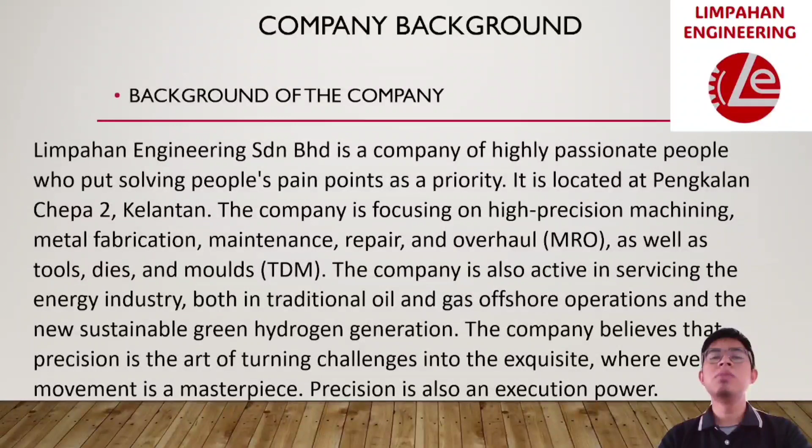The company believes that precision is the art of turning challenge into the exquisite, where every movement is a masterpiece. Precision is also an execution power.

Next is my roles and responsibilities during my internship at the company. My role at the company is as a designer in the operation department. My responsibility first is to design the product needed by engineers. Second, to prepare the design drawing.

Third, to prepare the detailed drawing and make an isometric drawing. Fourth, to sketch the product that has been fabricated using SolidWorks. And fifth, to measure the product that has been fabricated.

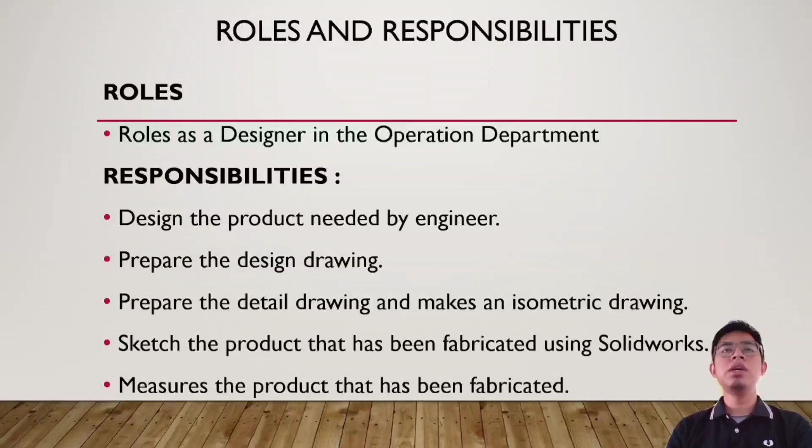Next, the project that I handled during my internship is first to do the design drawing of the chemical storage rack. This is a chemical storage rack that has been fabricated. First, I make a rough sketch for the project, called chemical storage rack, that has been fabricated. This is a rough sketch.

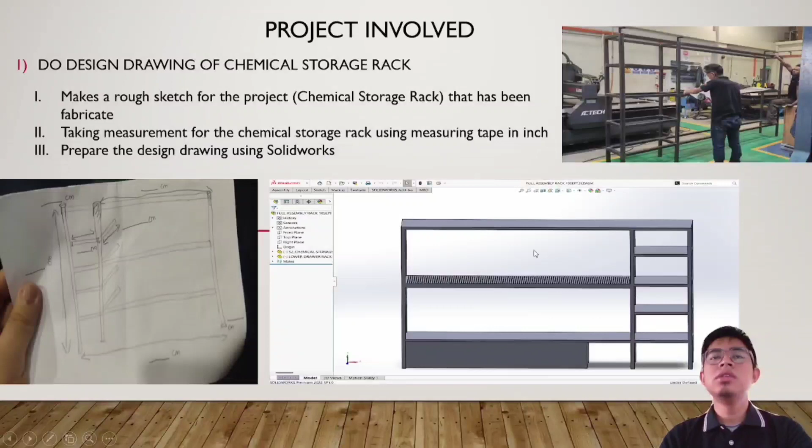Next, I take the measurement for the chemical storage rack using measuring tape in inch or cm. And then I prepare the design drawing using SolidWorks. This is the design drawing that I have made using SolidWorks.

Fourth, I prepare the part drawing detail for the chemical storage rack needed by the engineer. This is a part drawing, also called detail drawing. And fifth, I was involved in helping paint the product for a better finishing process. This is the red color of the chemical storage rack.

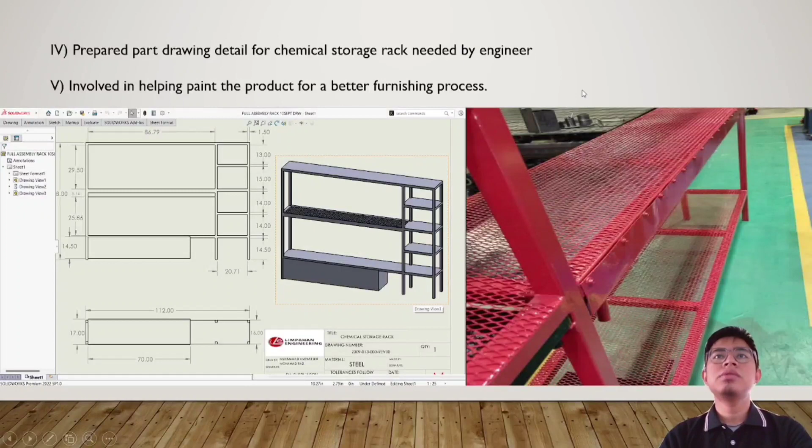And then I help with placing the chemicals and other waste on the rack according to the type, such as coolant oil, paint, and other material that is easy to burn.

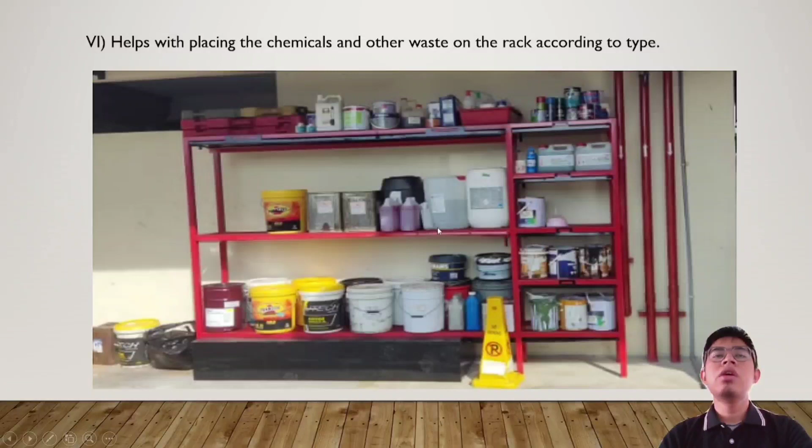Next, I do the design drawing of the IBC tank. As we can see from the slide, this is the image of the rough sketch that I sketched as I measured the component. Next, I take the measurement of the IBC tank using the measuring tape in inch or cm. Then I prepare the design drawing using SolidWorks.

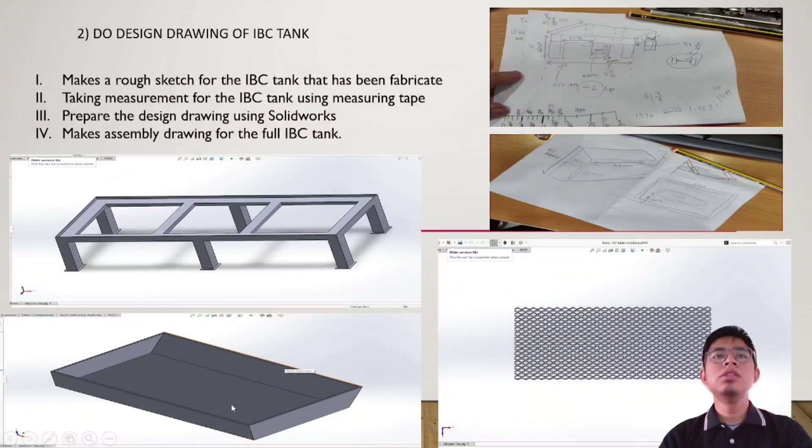These are the three design drawings that I prepared, starting from the body of the IBC tank, bottom surface of the IBC tank, and mesh pattern of the IBC tank. And then I make an assembly drawing for the full IBC tank. This is an example of the assembly drawing.

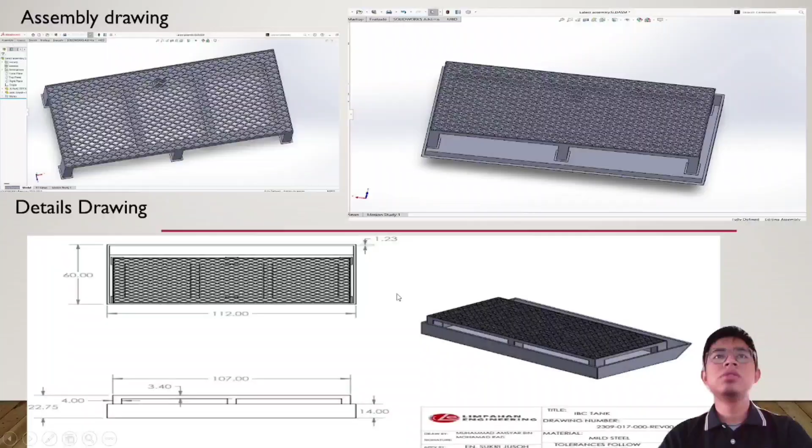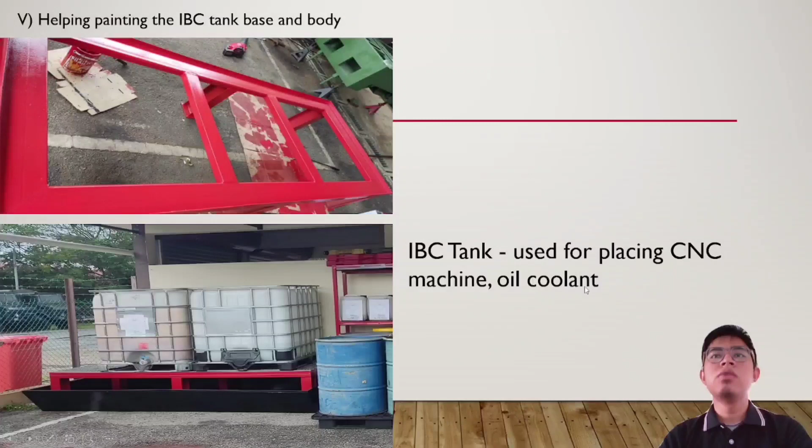And this is an example of the detailed drawing that I have made by taking out the dimensions and sending it to the production engineer. I also help in painting the IBC tank base and body, which are red color, and help place the IBC tank at the specific location. The IBC tank is used for placing CNC machine oil coolant.

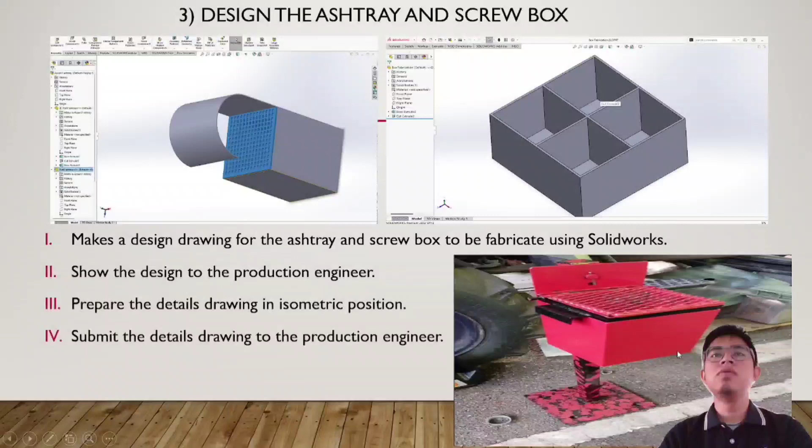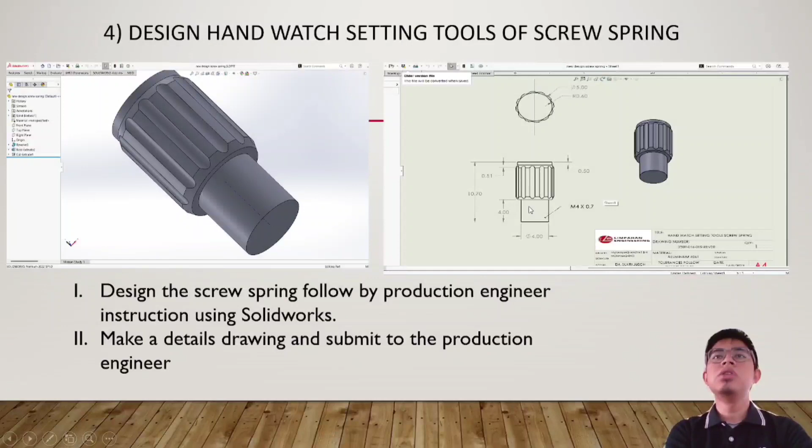Fifth, I make a detailed drawing for the burgeon, also called hand watch setting tools. First, I check and make a detailed drawing. Then I edit the sheet format of the detail drawing and rename it according to the drawing number list. This is an example of the detail drawing that I have checked and made.

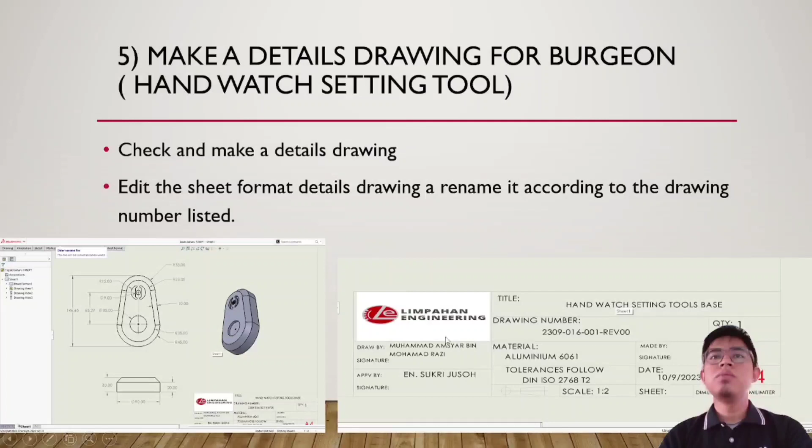And this is the format detail that I have given the number and the name. This is a full example of the burgeon, or hand watch setting tools, that I have made part drawings for.

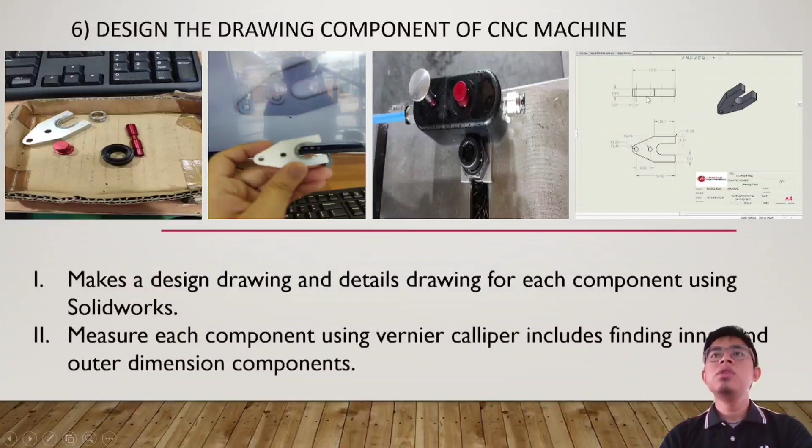And the sixth project, I designed the drawing of the components of a CNC machine. It has five designs for the CNC machine, and I managed to do all five designs of the CNC machine components. I made a design drawing and detail drawing for each component using SolidWorks and measured each component using a vernier caliper, including finding the inner and outer dimensions of each component. I also made a part drawing or detail drawing for each component.

Next, I also helped in 3D printing of the drill holder. I printed the drill holder for the CNC apparatus using Ultimaker and IdeaMaker 3D printing machines. This is an example of the IdeaMaker, and this is a drill holder for the placement of the CNC machine tools such as end mills and other components.

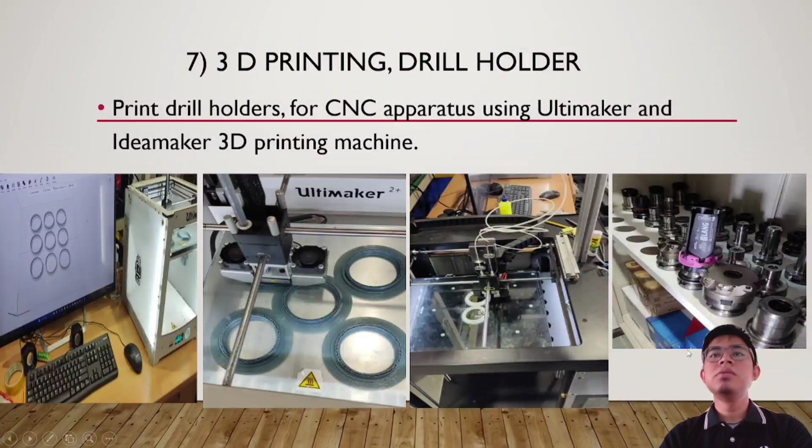Next, the subject that I have learned and applied during my internship is SolidWorks skill. For the summary, similar to the CATIA V5 software used in UiTM, both are the same in defining parameters and constraints. The assembly design, which is able to create complex assemblies consisting of multiple parts and components, is also the same. Next, the subject I have learned is detail drawing or part drawing. Creating a detailed drawing before starting a fabrication project is crucial for quality control and precision in manufacturing.

Next, the subject I have learned is 3D printing machine skill, which is similar to the subject that I learned during lab manufacturing at UiTM. We were able to understand the basic skill of using the machine by setting it up. The next subject that I have learned is gaining working experience, because it helps to build a confidence level and prepare for the real working field.

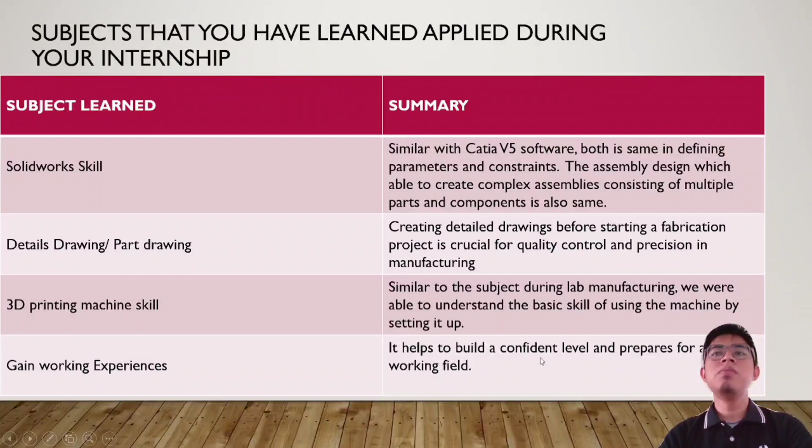Then the next subject that I have learned is types of material. This is an example of the types of steel. I understand the different steels such as aluminium 6061, stainless steel, mild steel, carbon steel, and aluminum steel. I also understand the different types of screws such as bolts and nuts, socket or cap screws, button screws, and countersunk screws. And lastly, I was able to learn basic CNC machine knowledge.

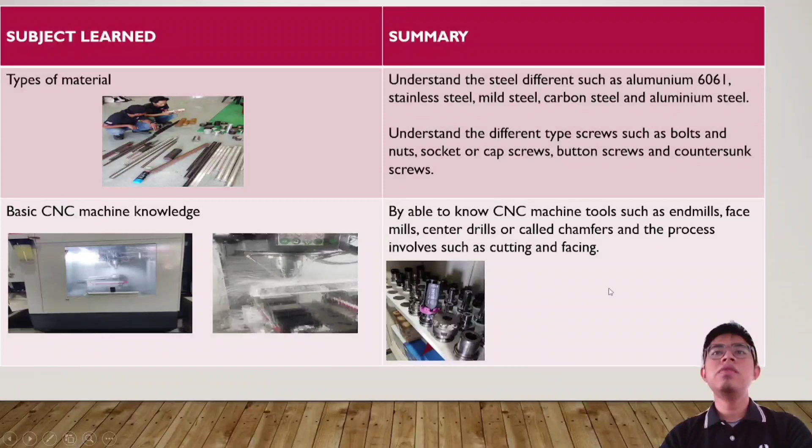I was able to know CNC machine tools such as end mills, face mills, center drills or chamfers, and the processes involved such as cutting and facing. This is an example of the CNC machine tools.

And next, the challenges that I faced during my internship. One is the challenge of using new software, from CATIA V5 to SolidWorks. Next, the challenge of using different 3D printing machines. There are three machines that are different to set up, such as Prusa, Raise3D, and Ultimaker. Each of the machines has its own setup. The next challenge is the deadline of the tasks given. For example, the detailed drawings and design drawings that I made had a deadline to be submitted to the production engineer.

The next challenge I faced is the learning curve. Adapting to a new work environment, company culture, and industry-specific practices can be overwhelming initially to me. Lastly, precision and accuracy. For example, achieving the required level of precision in measurement, drawing, and the manufacturing process can be a significant challenge because it follows the precision needed by the detailed drawing.

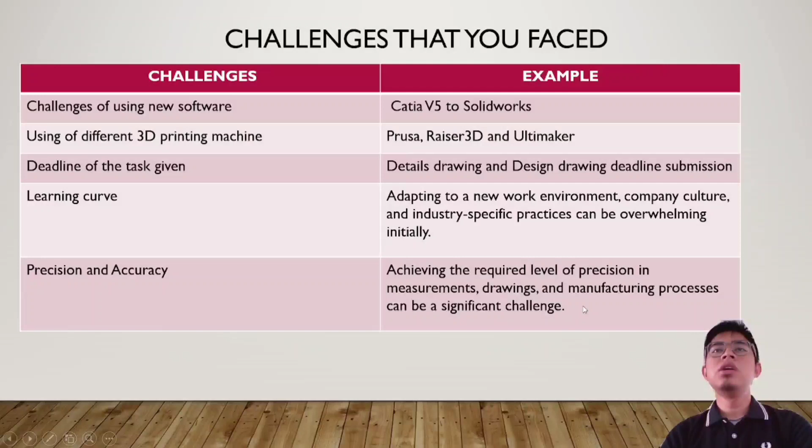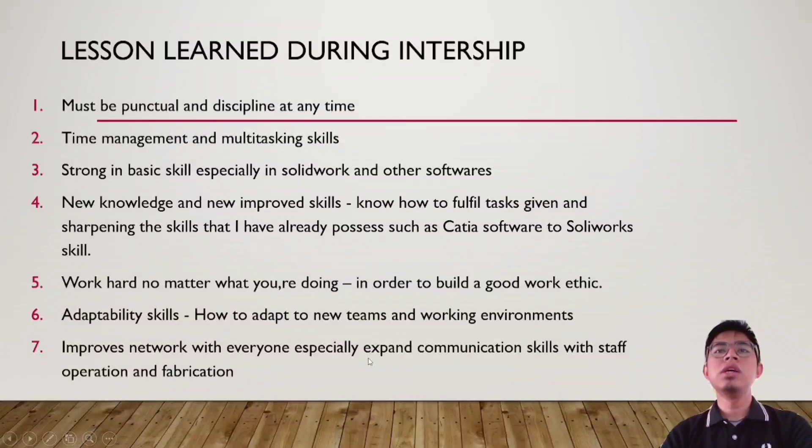Fifth, work hard no matter what you are doing, in order to build a good work ethic. Sixth, adaptability skill. It is important to adapt to new teams and working environments. And lastly, to improve networking with everyone, especially expanding communication skills with staff, operation and fabrication. That's all for me.